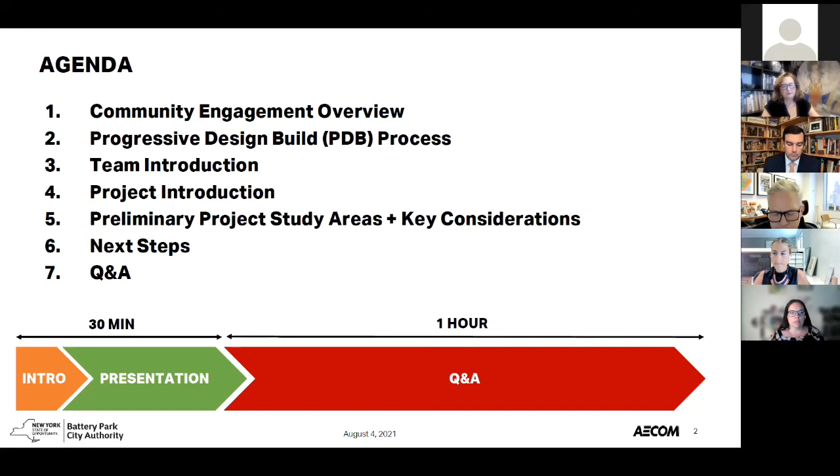So let's go ahead to the next slide. Okay, so this is the agenda for the meeting, and really the main goal here is to provide you with an overview of the project area and the objectives of this effort, and to begin a dialogue with the community about this project, as we have with other resiliency efforts. At the outset of this new engagement, we wanted to start getting your thoughts and feedback, as well as your questions early on in the process, so they can help shape our path forward. We'll talk a little bit about the framework we're using, and you'll meet the team, but really we'll get into the overall review of the project and what's ahead. And then we'll leave a lot of time at the end for you to raise any questions or provide feedback to this project team.

Next slide. As I mentioned, we have a lot of information online, but this team here and our staff at the authority make every effort to engage the community on these projects. So just wanted to remind you that this project will be no exception, and we'll be engaging the community along the way, as we have in the past with all of our other resiliency projects.

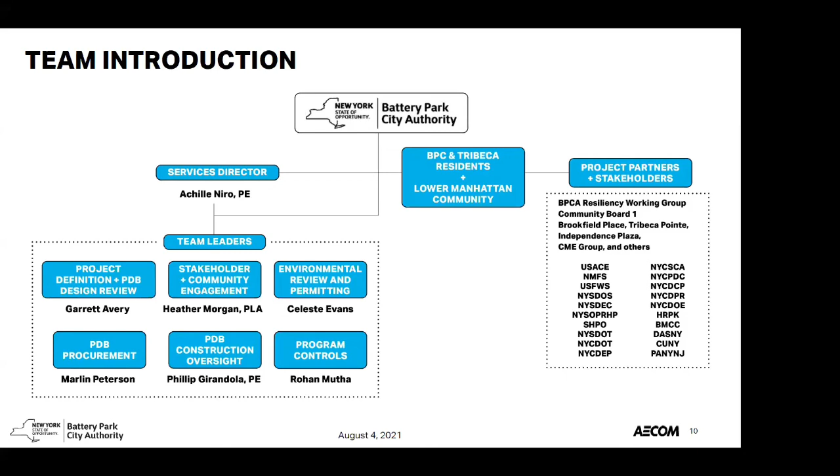Once the progressive design build firm comes on, as BJ mentioned, we have several people in this org chart that you will see throughout that process as well. In support of Achille is our team leaders. We had Garrett Avery, as I mentioned, who's heading up project definition and design, myself, and then Celeste Evans for environmental review and permitting from AKRF. The lower tier of team leaders, you're going to hear from them a little bit at the beginning of the project, but once the progressive design build firm is on, you're going to hear a lot more from Marlin, Phillip, and Rohan. All right, next slide.

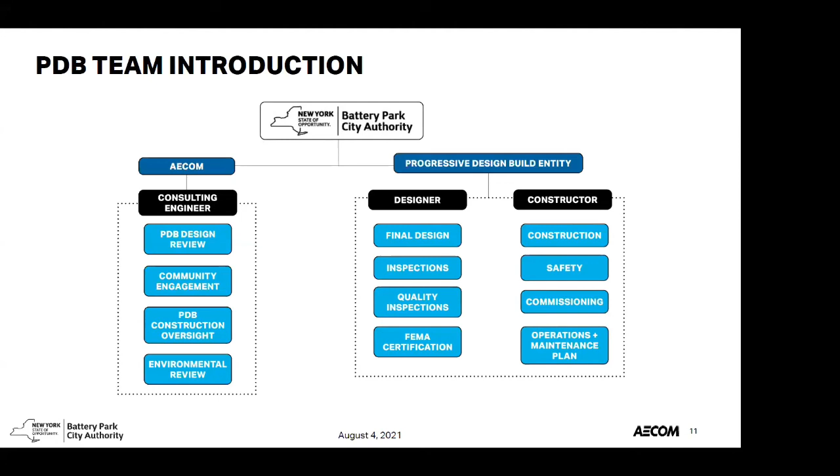So just to complement what BJ had set up from the progressive design build perspective, AECOM will be the consulting engineer for the first phases of this project. You'll see the array of services we'll continue to do on behalf of Battery Park City Authority. On the right-hand side, once the progressive design build team comes on, they will start caretaking design development, final design, carrying it through construction, FEMA certification, and operation and maintenance plans.

So let's talk about the project. You guys have seen this slide before, on the south. I'm sure you've seen 100-year floodplains in many of the resiliency projects across Lower Manhattan. We wanted to resurface this image to make sure we're all on the same page at the beginning of this project about what it means for the design criteria we're trying to meet.

So this is a 100-year floodplain. In simple language, if a 100-year storm event arrived in Lower Manhattan in today's conditions, this is the inundation pattern you would see. Look at the dark blue area and see where the low points are and where the inundation would occur throughout Lower Manhattan.

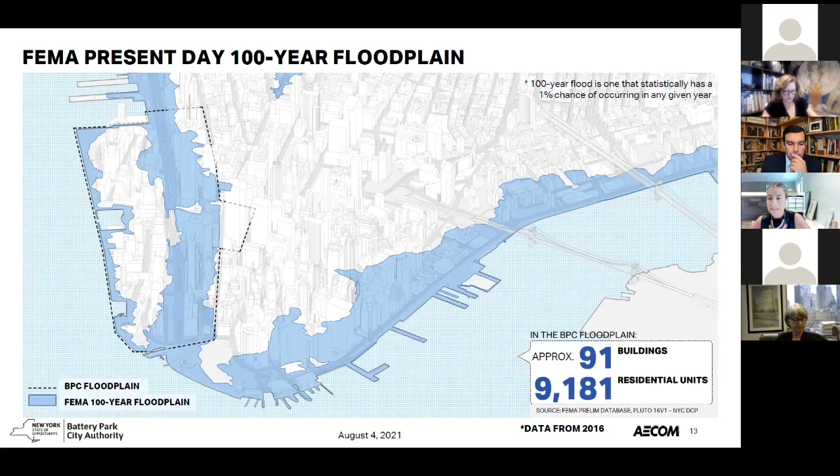What this project is designing for, though, is a 100-year event in the year 2050. You can see the augmentation or amplifying of the floodplain because of the level of event that would arrive and where it would go. So remember, as we go through this today, we are not designing for a 100-year event in today's conditions. This flood project is designing for a 100-year event in the year 2050.

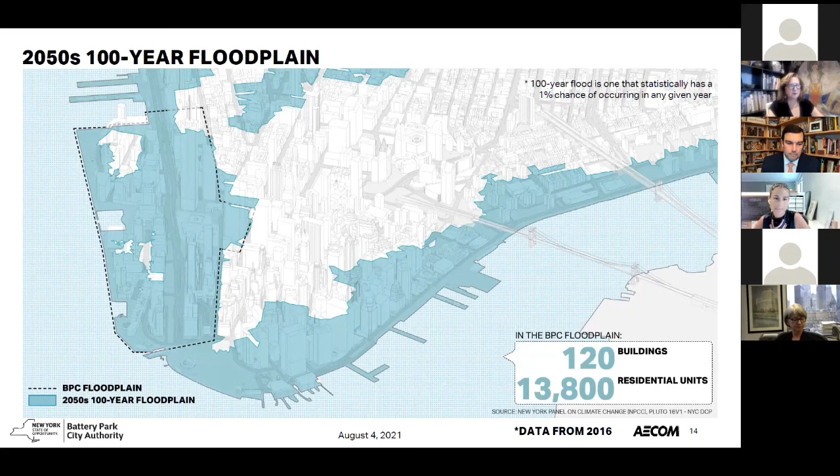Everyone for the last several years has seen what the New York City region has been trying to do in response, not only to Hurricane Sandy, but any other intermittent events we've had. It's really important to know that these Battery Park City resiliency projects are part of a larger system of response across Lower Manhattan. Whether we're looking at coastal surge or storm and stormwater management, all of these have interdependencies and are pretty much all connected. You've probably heard of these other projects or been part of these meetings, and maybe it's repetitive for some of you, but we wanted to make sure everybody understands the context of these projects within Lower Manhattan from the beginning.

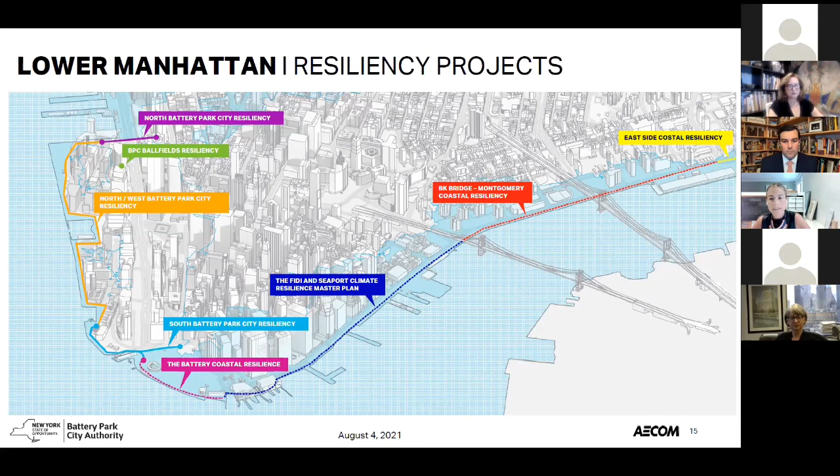We've got the East Side Coastal Resiliency, the Brooklyn Bridge Montgomery, the FiDi and Seaport, and the Battery Coastal Resilience, all on the East River side and Lower Manhattan side.

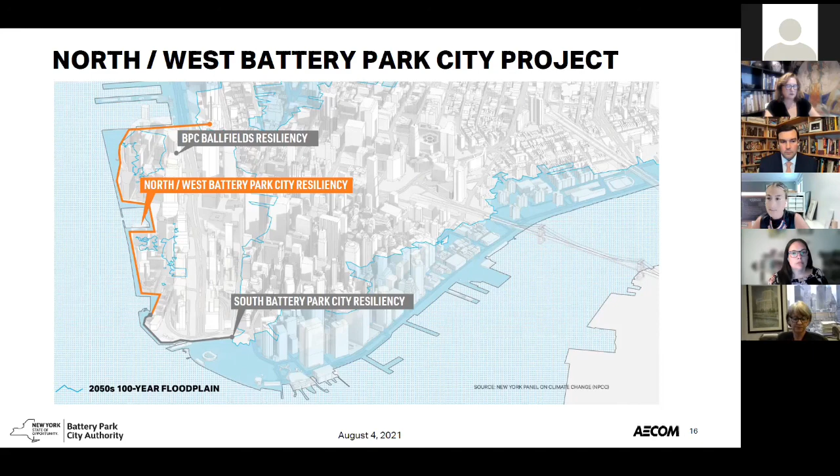So for this project specifically, as BJ mentioned, and Garrett, you saw Garrett before on the north, we have combined the north project with the west. In totality, it's that entire orange line depicting that part of the project area. The other projects at play are designed in tandem with this, as you've seen in the past, the South Battery Park City Resiliency Project and the ball fields as well.

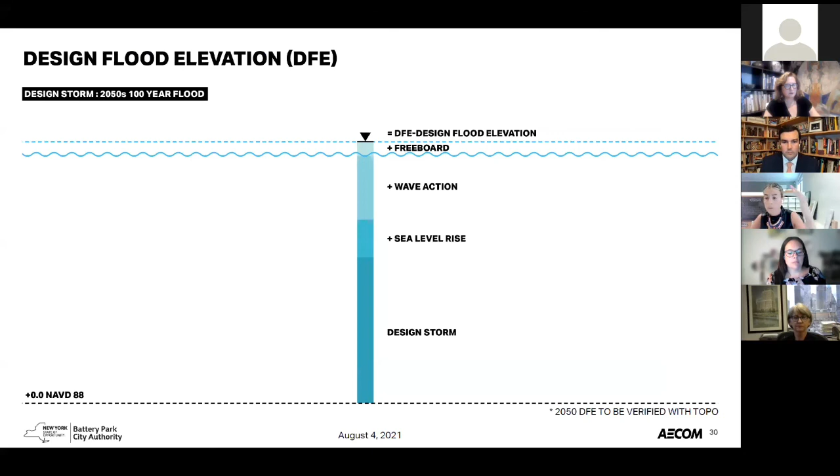As mentioned, in designing for the 2050 100-year event, we've spoken a lot in the past about design flood elevations. Just to get everybody on the same page, what makes up a design elevation? That design storm, the first blue bar at the bottom, is the 100-year event in the year 2050. We then add sea level rise, wave action, and freeboard to arrive at that design flood elevation.

When we take that design flood elevation and compare it to the slides we showed earlier about the 100-year floodplain, and compare it to the South Battery Park Resiliency Project and the north to date, this is what you get. On the far left, you see Hurricane Sandy, with an approximate coastal surge of 11 to 12 feet. Today's 100-year FEMA level without sea level rise is an approximate range of 11 to 14 feet.

And then if you look over as we move to the right-hand side of the slide, the orange bars and the yellow bars are depicting the North Project, the South Project, and an approximate for the Northwest Project. Please note that on the North and the South, we have been able to do coastal modeling, which has allowed us to refine the design flood elevations. You can see the ranges there.

Currently, since we just started the Northwest Project, we have not had the chance to complete all the bathymetry and topographic surveys that would go into our refined coastal model to give an accurate design flood elevation. So for today's meeting, please know this is an approximate range, going from 15.5 to 21 feet. Next slide, please.

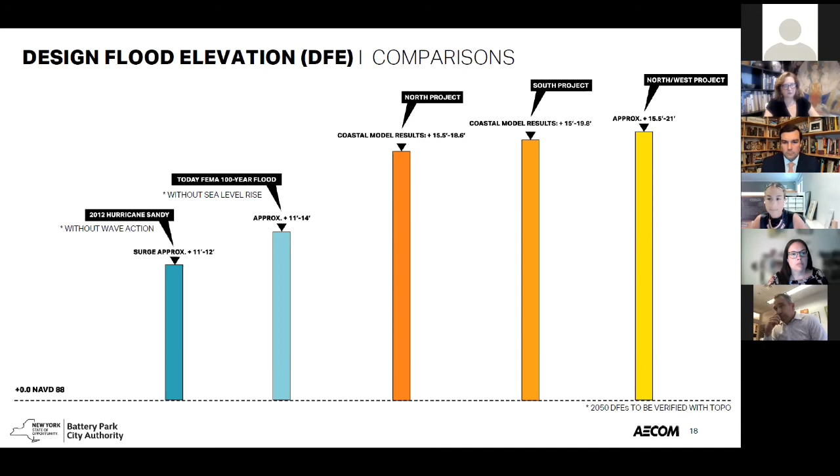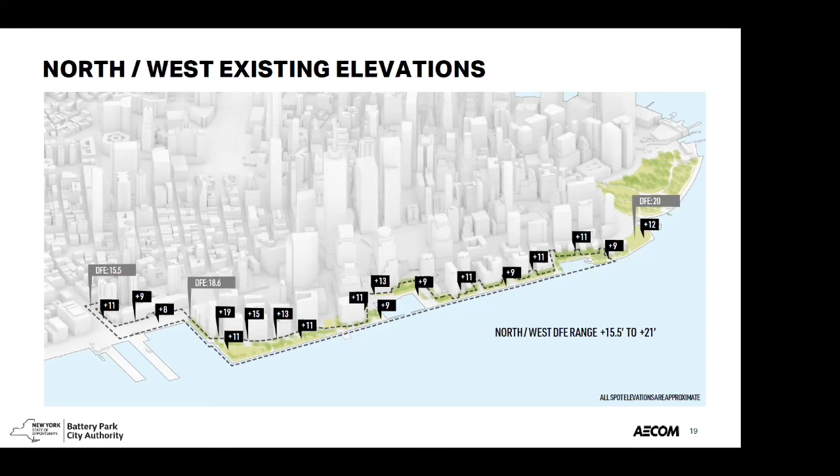So what does that mean to the existing contours within the project area right now? The black flags you're seeing are depicting approximate existing conditions for topos and contours. We have not had the chance to do topographic survey across the 92 acres on the west-hand side, so these again are approximate. The DFE range is from 15.5 to 21.

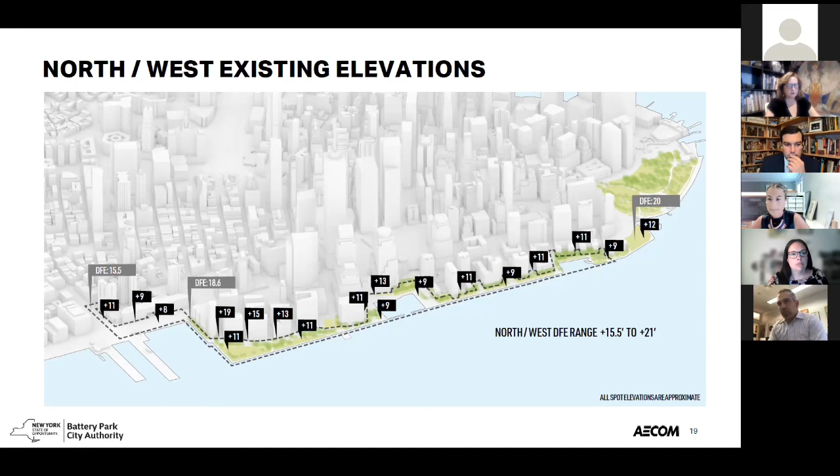This project will tie in again to the South Battery Park Resiliency Project. And as I mentioned earlier, the North has now been combined into this. We did modeling for the North, so you see those light gray DFE flags from that information from the previous project. Okay, next slide.

How do we meet that DFE? We've seen this in our design interplay on the South and on the North, where there are a lot of different ways in which we can meet those design flood elevations. These are just examples of the different ways in which we can do it.

Some of the flood measures can be static, meaning they stay still whether it's sunny outside or whether storm events are coming. On the bottom part is a deployable measure - those aspects will go into gear, into action at the time of an event. We work really hard to make sure these flood measures are integrated into the urban fabric, and I'll touch on that in a minute.

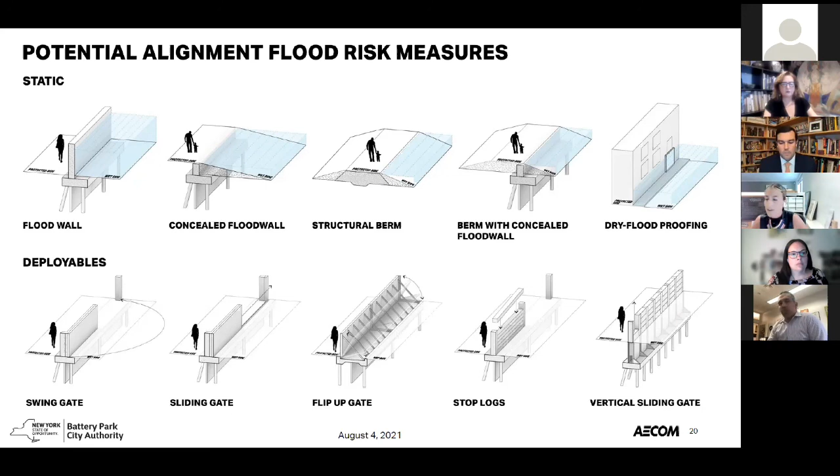But we just wanted you guys to get an idea of when we try to meet those significant design flood elevations, the wide range of ways in which we can do that. Next slide, please.

So project goals related to flood risk: we obviously want to reduce the flood risk related to future storm events - a 100-year surge event in the year 2050. We also are going to give flood risk reduction to Battery Park City, and there will be residual benefits to adjacent Lower Manhattan communities.

Another major goal of the project is to provide flood measures integrated into the urban fabric. It's really important that these flood measures are not treated as a separable element, but part of our landscape, culture, and environment. We also want to ensure the design allows existing use, programming, and aesthetics in Battery Park City to be retained and thrive into the future. And we want to have recognition and respect for the heritage of Battery Park City's design excellence and legacy. Next slide, please.

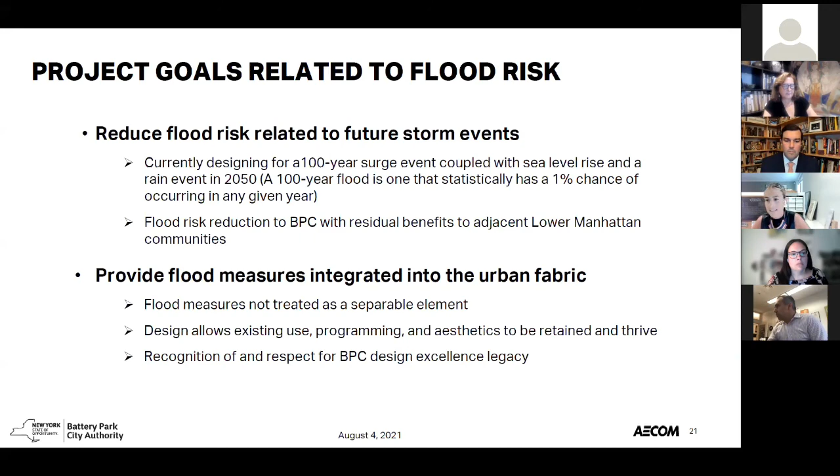And so here is your overall footprint of the project. Again, on the far right, it's going to be tying into the South Battery Park City Resiliency Project, and we'll continue up through over 9A and into Tribeca and the BMCC area. Next slide.

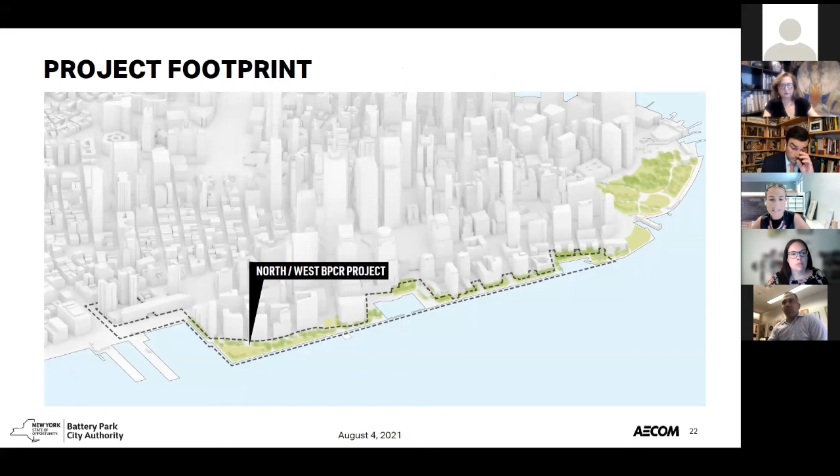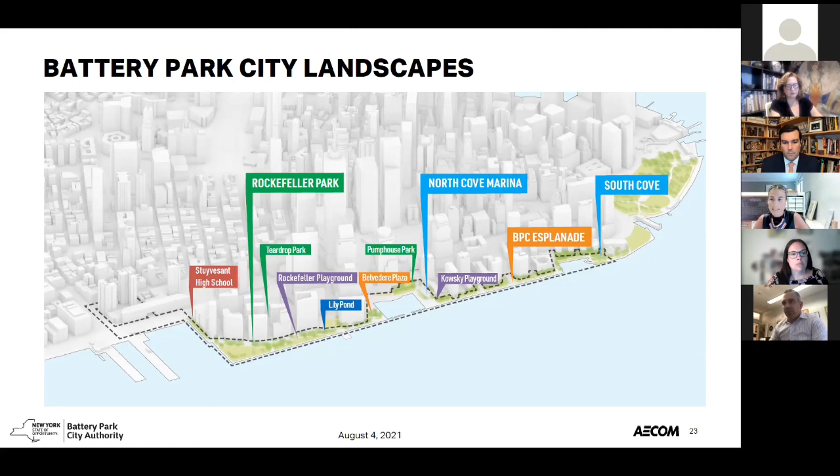Unfortunately, a lot of these spaces are going to have to change in different ways to meet these design flood elevations, but we're going to work collaboratively with you to ensure those changes are something that you want and that you're a part of. Next slide. And so when we start to unpack that delineated project boundary, we've broken it up into 8 study areas.

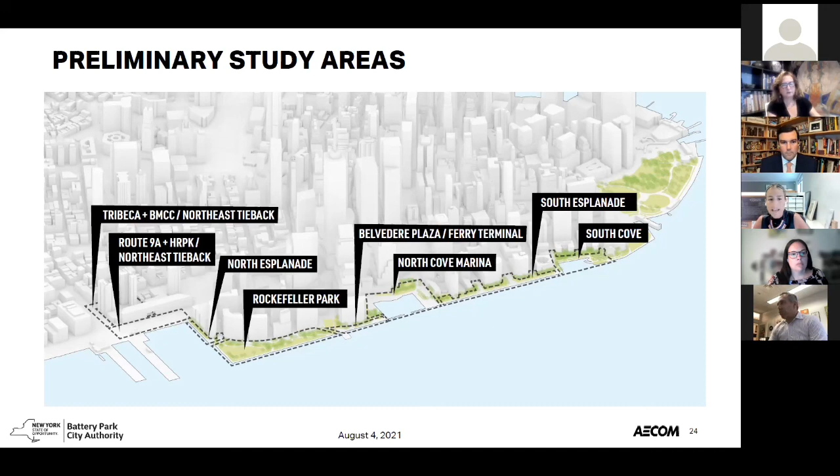Thank you, Nora, and thank you, Heather. Great to be with you all again.

Tonight, for the next few minutes, I'll catch you up on where we ended up after our final community meeting for the standalone North project, and share details from that conversation and from months of follow-up discussions our design team had with agencies, FDNY, Hudson River Park Trust, and other project partners.

Then I'll spend a few minutes going through each of the non-North Battery Park project study areas, where through site visits over the last couple months and desktop study, we've started to understand elements and landscapes in Battery Park City as individual outdoor rooms, where collections of spaces have similar characteristics or are used similarly, or in other cases are directly adjacent to one another but work differently.

So it's important for developing the performance standards and technical criteria BJ mentioned at the outset that we understand this at almost a park-level scale as we make our way along the alignment, which combined together is actually 1.3 miles long, believe it or not.

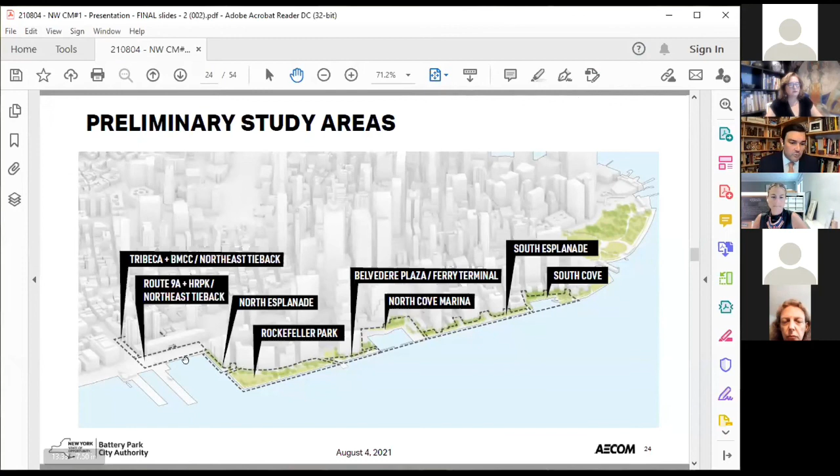When we were talking last, it was simply about the North Resiliency Project, which for comparison was only about 2,000 linear feet long, a little less than half a mile. Now we're at 1.3 miles when all combined, which underscores the importance of the approach we're excited to begin taking, looking at each of these spaces more individually.

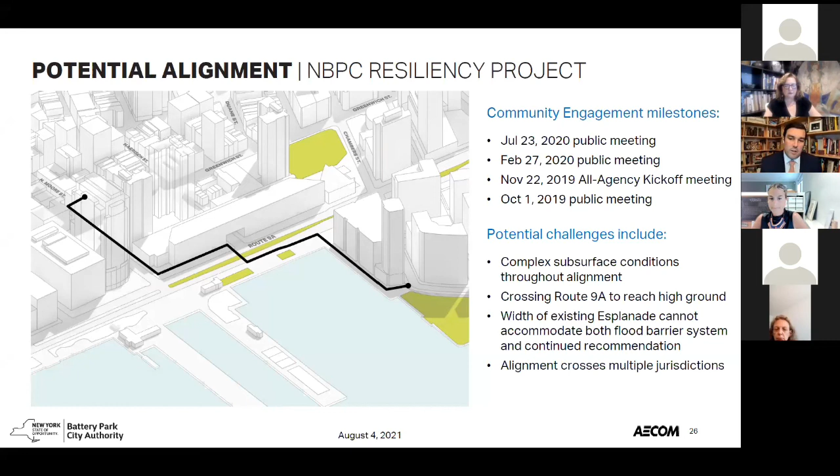We also evaluated other alignment tieback options east of Route 9A, including Harrison Street, just south of North Moore, and Chambers Street, just south of Harrison. Through that deliberative process, we arrived at this particular alignment as our most preferred for a number of engineering and aesthetic reasons.

Some of the challenges we faced here include really complex subsurface conditions, years and decades of utility development, abandonment and relocation, as well as the basic challenge of crossing Route 9A with an operable flood barrier system while not interrupting actual service on Route 9A or West Street.

Another complexity here, slightly different from the West alignment, is that this segment requires partnering with and locating across multiple jurisdictions. It's not solely within Battery Park City, as the West alignment is.

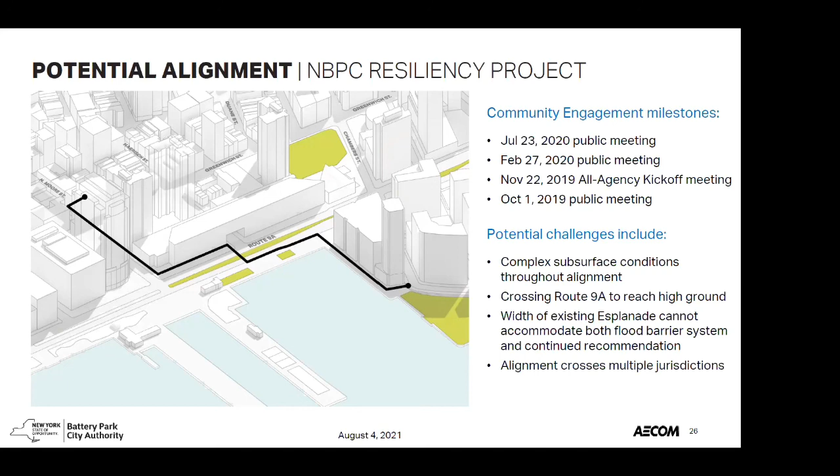As a reminder, we're going to move from north to south, starting from the very end of the north alignment at the intersection of North Moore Street and Greenwich, all the way to South Cove eventually.

Here's a reminder of where we ended up in the original North project prior to it being combined with the West. This view looks southeast toward Independence Plaza and the Borough of Manhattan Community College, illustrating a series of flood infrastructure interventions pressed as closely to the building facades as possible to limit interference with the sidewalk and streets.

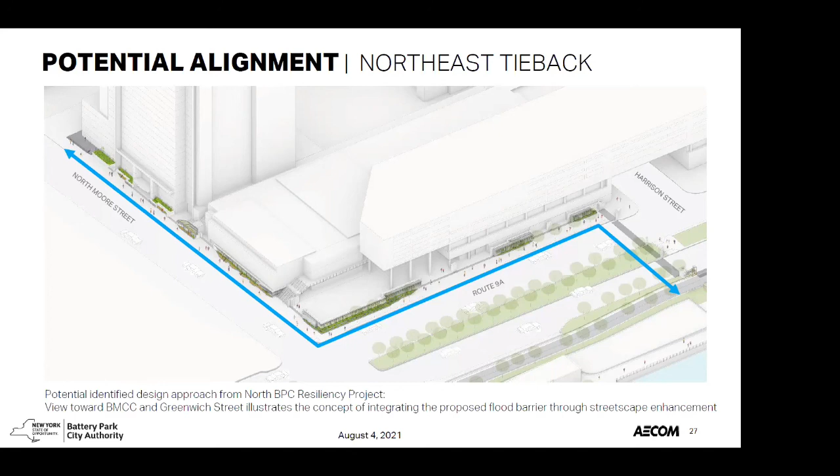This segment here is where we are moving south from North Moore Street back toward Battery Park City. This is where the alignment at the time shifted from the east side of Route 9 to the west side, just north of the Harrison Street intersection. From there, the alignment made its way along the eastern edge of the bikeway at about 4 feet tall or so, until we were able to reach Battery Park City and turn and meet the flood alignment on the Esplanade.

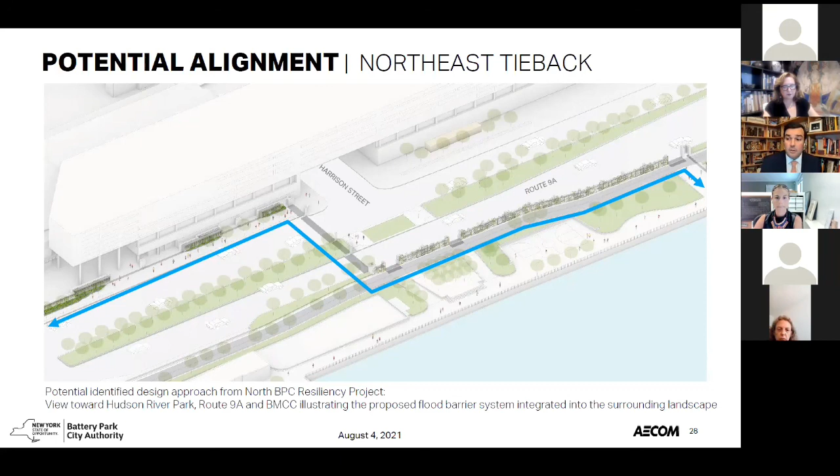What we learned through the last community meeting and in subsequent conversations is that there's probably a more appropriate middle ground that doesn't extend all the way, but doesn't necessarily hold the original footprint either. One of the primary challenges in that instance was the inability for emergency vehicle access if we held the existing width, to actually be able to make its way to Rockefeller Park. That was a major factor for us.

We also heard at our last meeting that it was important that both bicycles and pedestrians be able to exist together in a way that is comfortable and safe for everyone. So with a few rearrangements to seating and central circulation, this is where our final concept ended up. All right, next slide, please.

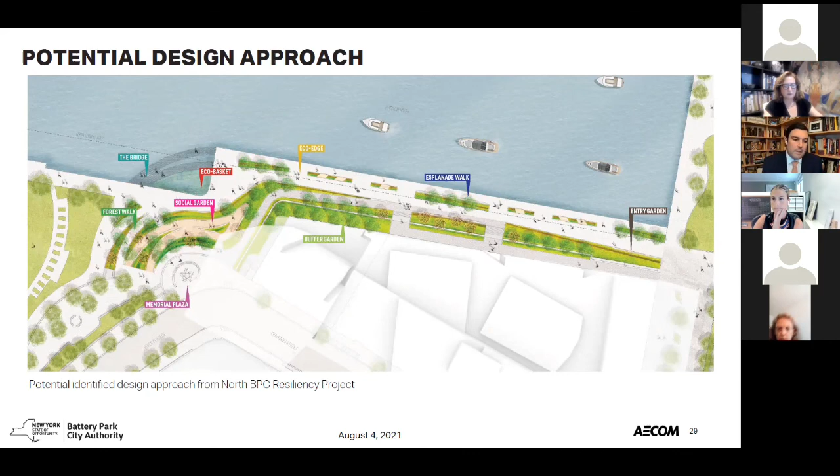All right, so now we're going to jump into the study areas as we're moving forward. As Vijay mentioned, one of AECOM's roles at the moment is to develop the performance standards, the criteria, and the design approach, of course with the community and through this process over the next several months, to ultimately guide the project development by a progressive design build team.

So as I mentioned, we broke these into smaller study areas. In Rockefeller Park, we're looking at a really well-established landscape, long, expansive views across green open space. That is a landscape character that I think we all can picture in our mind, but one that also speaks to all of us.

In the case of integrating flood risk resilience into this landscape, we have a series of choices to make, and as concepts are developed, we will go through them. But one of them is simply integrating aspects of flood risk reduction into an existing established landscape. Next slide, please.

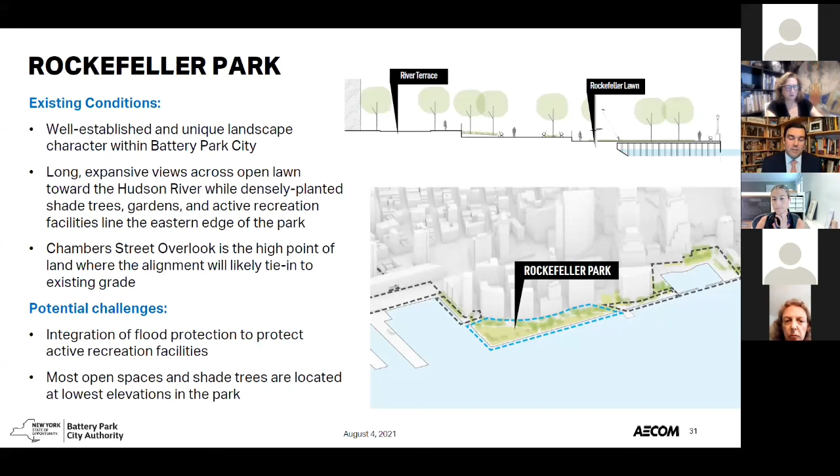Here are some images that I'm sure you're familiar with, but for folks joining us for the first time, next slide please. This is, of course, a northwest view.

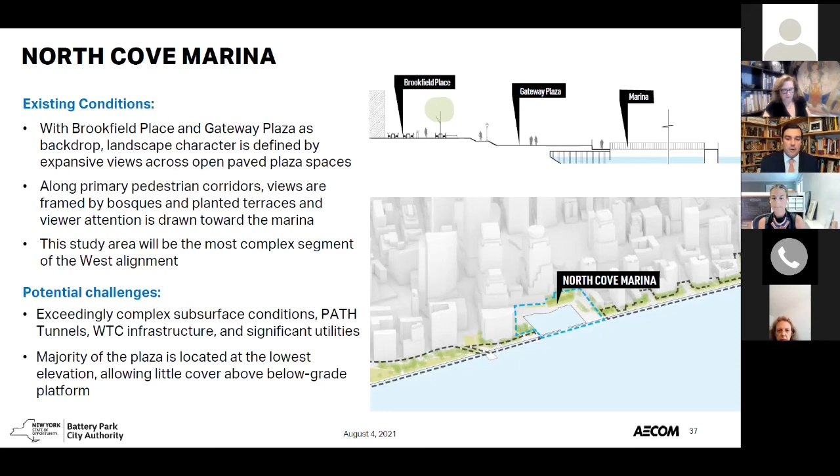World Trade Center related infrastructure like river water intakes and stormwater outfalls, relieving platforms that are well below the plaza themselves, support everything we see above ground. It's actually supported by a subsurface structure. So navigating this area is going to be exceedingly complex, but we feel that there are many opportunities to celebrate the existing thematic design with terracing and other aspects. We can go to the next slide, please.

Currently viewing back toward Brookfield Place. Next slide. This is a view looking northeast from the south side of the marina. All right, next slide, please.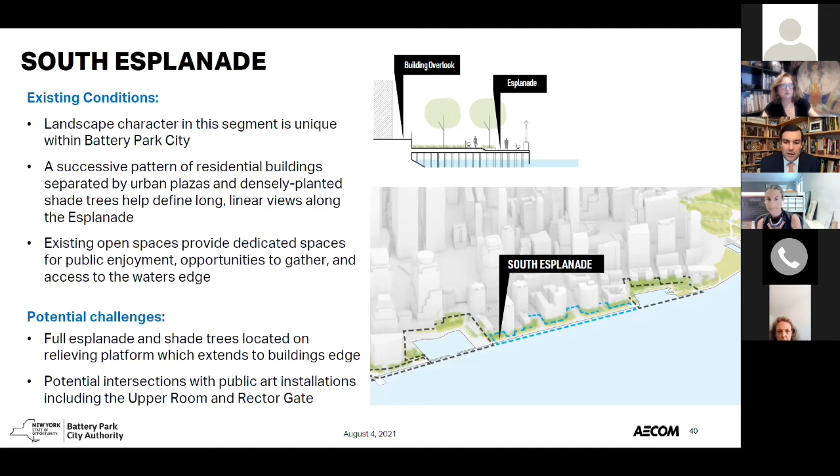We also felt that it is special given the hierarchy of passive and more active recreation opportunities through the segment, so we are certain to be treating this in its own unique way. Finally, if we can move through a couple of the photos here. All right, and next slide.

All right, so finally that brings us to South Cove. And this, of course, is a unique design landscape as well. I think for those of you familiar with it, the wooded glade between the river's edge and primary walkways really is sort of a unique experience in Battery Park City and in Lower Manhattan in general. So that as much as it is a unique attribute, it is also one of the primary challenges.

In this area, we could expect to see some of the higher elevations on that DFE number that Heather was describing. So it's going to be a series of working back and forth with the community and our design team to really get the performance standards right in this area. With that, I'd like to move to the next slide.

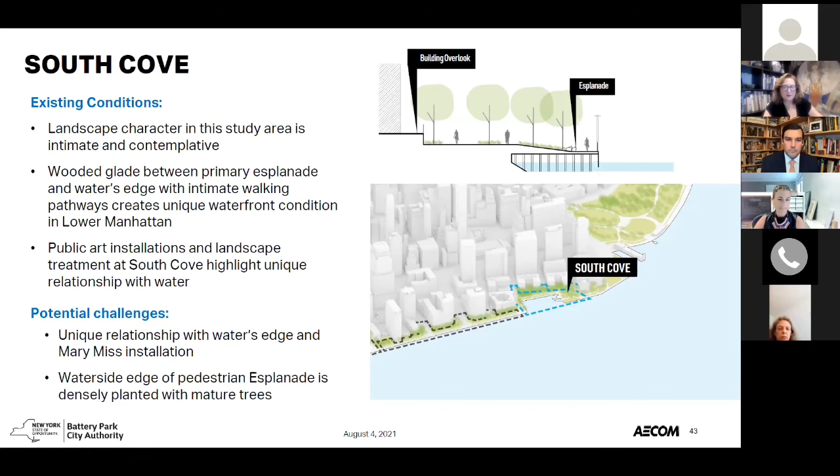All right, so Nora. Yes, thank you, Garrett, and thank you for all of that. Before we move forward, can you go back to Belvedere Plaza? Someone in the chat asked that we do that. So let's just take a quick peek here. Garrett, do you want to say anything about Belvedere Plaza? Someone had asked that we go back to this, and I don't know if you want to touch on this at all.

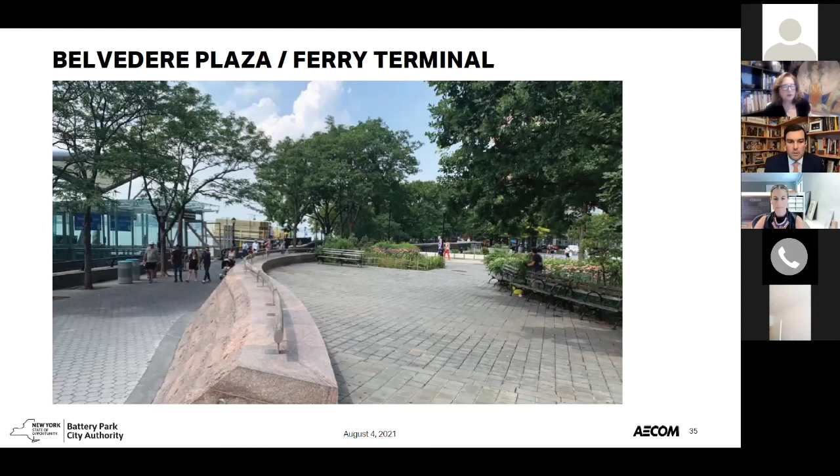Sure. So I guess the one thing I'll say, actually, if we could, I think go one slide forward. I'm sorry. Yes, there we go. All right. So,

Belvedere Plaza is of course one of the many significant spaces that we're thinking through, how best to navigate this course, and also what exactly the design goals and objectives should be in the zone. As I mentioned, this is one of the really tricky segments where the project alignment may transition from the larger expansive landscape intervention to a much more specific narrow corridor. So this area, just generally speaking, is one of the most complex from a design and construction perspective.

Thank you, Garrett. Karina, we could go to slide 45, and I'm going to turn it over to Heather for next steps. All right, great. Thanks, Garrett. Thanks, Nora, I really appreciate it. All right, so we want to watch our timestamp here because we want to get to your Q&A, so I'm going to move through this slide pretty quick.

With all these projects, we can do the coastal model so we can make sure we're super informed when we're doing our design development process here. We have site investigations: land surveyors have been out already on site doing bathymetrics and both terrestrial contour surveying, geotechnical activities, and environmental site investigations has begun.